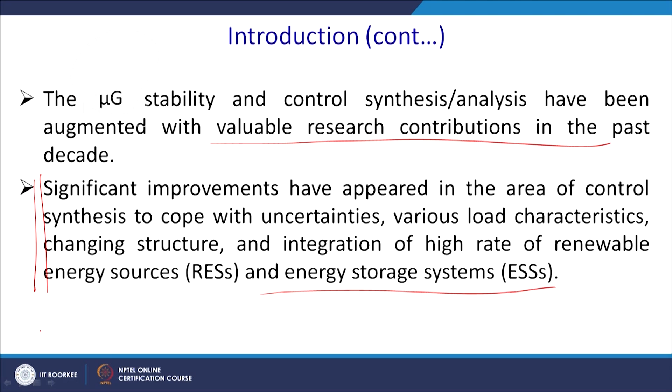And in recent years, some of the advancements of modern intelligent control methods are definitely the ANN. It has been evolving from the 70s. Professor Zadeh is an Iranian professor. He came out first with fuzzy sets, and that has been extensively used in microgrid applications, the FLC controller, and the multi-agent system, that is MAS. That is also used for multi-objective optimization.

Thereafter, you may have a particle swarm optimization technique, that is PSO, and another optimization technique is inspired from evolution. It has been considered that our kids are much smarter than us. It is because of evolution, and that entity has been taken into consideration while designing the controller, and it works on the optimization technique and the heuristic optimization technique.

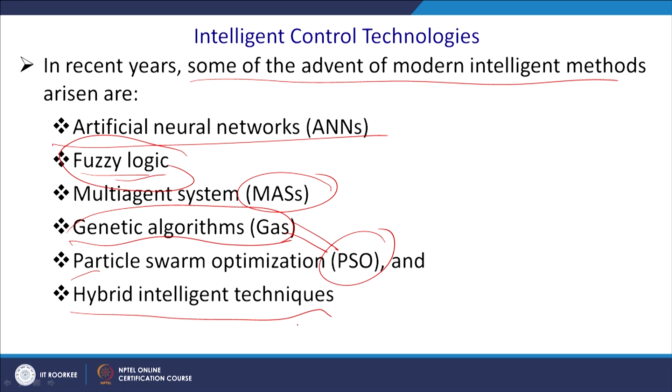But this too has a convergence problem, and for this reason the hybrid intelligence technique is used, where you have a normal gradient based optimization technique, then you couple it with genetic, particle swarm and other optimization techniques to get better results. So, that is the hybrid intelligent techniques.

Now, let us first discuss the fuzzy logic controller. We abbreviate it as FLC sometimes. Due to the simplicity, why simple? Because it works on linguistic hedges, which human beings are familiar with. The robustness, and you give a number to your membership functions. Say in your cities, if it is 40 degrees centigrade you say it is the hottest, if it is 30 you say warm. So, accordingly, in case of hot, you can define the membership function linearly sometimes, and for this reason it is simple.

It is robust because it has its own fault tolerant capability, and model free property. One of the biggest problems is that we require to make a model while designing the prototype. When you are scaling down or scaling up, you require knowledge of the mathematical model. That mathematical model knowledge is not required in case of fuzzy logic. So, you can scale it down and scale it up without having knowledge of the model.

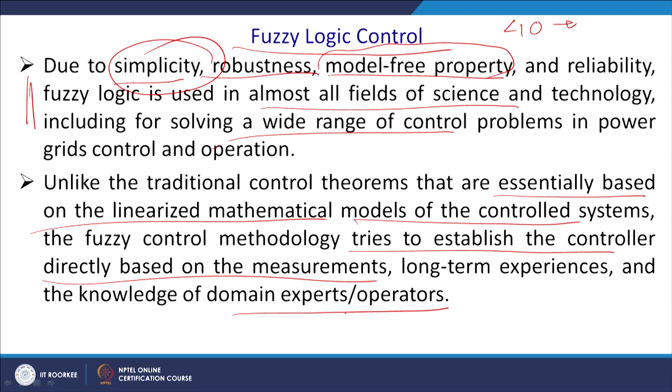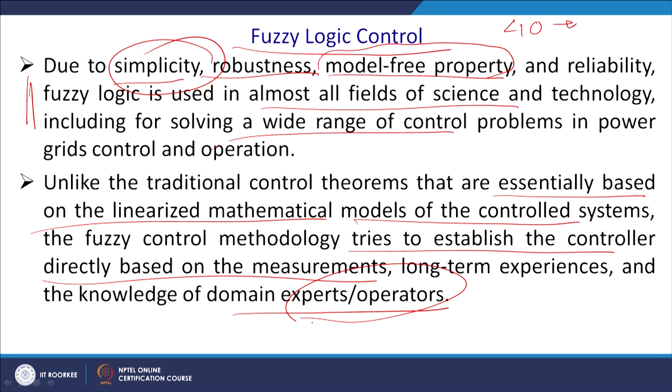So, when you know the cause and effect relations, that is basically the fuzzy expert system. You know, if it is warm, you require to put on this cloth. Say if it is a fuzzy logic controlled washing machine, you know that if the cloth is dirty and the cloth is jeans, this will be the time to be set for your washing machine. That is a rule base.

The application of fuzzy logic in a microgrid system can be classified into three categories. Using the fuzzy logic system as a main controller, as you have seen mostly in a master slave controller. Using the fuzzy logic system as a primer for tuning gains of the existing controller. As you have seen, you have different controllers in a peer to peer network, you require a PQ controller, and we have discussed so many PI controllers.

Ultimately, this PI controller will act well if you have optimally designed the values of Kp and Ki. For this reason, to get the best approximations of the PI controllers, we can use the help of fuzzy logic without having knowledge of the plant. So, in that area also fuzzy logic can work. That is what it says, using the fuzzy logic system as a primer for tuning the gains of the existing controller. And what else? Using the fuzzy unit to support, and sometimes in parallel with, the conventional controller.

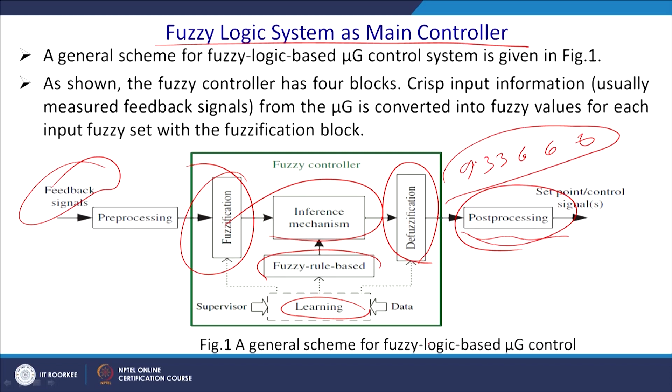There are many methods of defuzzification, and thereafter post processing, because if it generates 9.3333666 as a value for the PI controller, of course you cannot provide that value, and for this reason you have to give some kind of approximation. That is the post processing of the signal, and that value you will feed to your plant. So, this is the way you will work with the fuzzy logic as a main controller. We will continue with that.

The universe of discourse, that is a mathematical term, of the input variable determines where that universe of discourse is. Let us say theta, and your function is sine. So, your output is sine theta; it varies between -1 to +1. It determines the required scaling and normalization, something we require to do for per unit operation. So, this kind of normalization is required to fit it to the model.

The inference mechanism determines how the fuzzy logic operations are performed, and together with the knowledge base determines the output of each fuzzy if-then rule. It is a cause and effect: if this, then this. Those are combined and converted to the crisp value, that is a normal set value, with the defuzzification block. There are many ways to defuzzify it, and the crisp output value can be calculated by the center of gravity or the weighted average, and then the scaled output as a control signal is applied to the generating unit. This is the way any FLC will work, not only in case of the microgrid, but for any purpose.

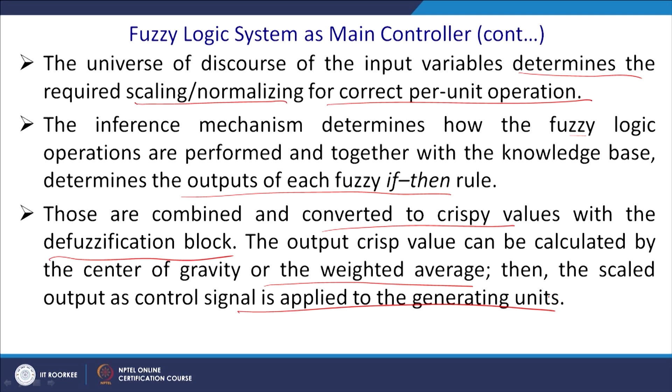Generally, a controller synthesis based on fuzzy logic for a dynamical system involves the following 4 main steps. Let us see one by one. Define the states and the input-output control variables and their variation ranges. Whenever we say states in the control system, we always understand the current through the inductor and the voltage across the capacitor, but its scope is beyond. So, it can have different states also, different quantities as the state.

Identify appropriate fuzzy sets and membership functions, and create the degree of fuzzy membership function for each input and output variable and complete the fuzzification. So, based on this, we have to complete the fuzzification.

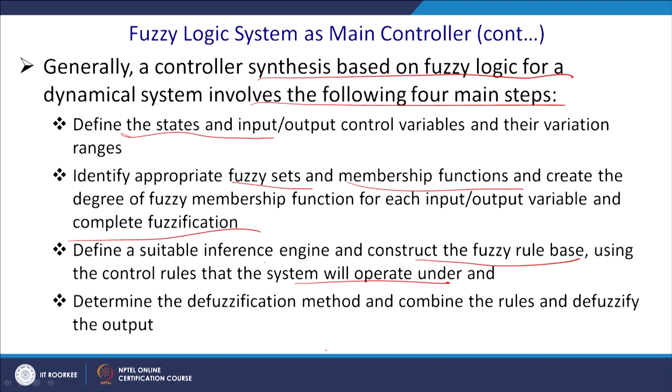Thereafter, define a suitable inference engine and construct the fuzzy rule base. That requires an expert system, if-then logic, using the control rules by which the system will operate, and determine the defuzzification methods, and combine the rules, defuzzify the output and put it to the plant for action. This is the way the FLC, or all fuzzy logic systems, will work.

In microgrid control, let us see how fuzzy can be implemented. The first step of controller design is to choose the correct input signals to the microgrid set points. So voltage, current, and if it is an AC microgrid, frequency, then PQ values, whatever value is required, you will take it from the set points. The output frequency, voltage, current, power and their derivatives are commonly chosen as inputs of the fuzzy controller.

Thereafter, these signals are used as rule antecedents, that is the if part. So voltage is this, current is this, power is this, frequency is this, load is this: that is the if part in the formation of the rule base. And the controller output is used to represent the rule consequent, which is called the then part of the rule base.

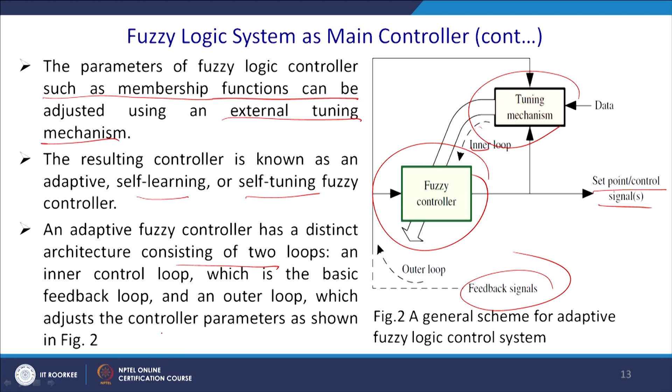An adaptive fuzzy logic controller has a distinct architecture consisting of two loops, an inner loop and an outer loop which adjusts the controller parameters, as shown in figure 2. The adaptive fuzzy logic controller commonly uses some other intelligent technique, such as a neural network, in the tuning block, which has learning capability because you can change the weights and it will learn, and this combination is said to be the neurofuzzy controller. The neurofuzzy controller is a fuzzy controller that uses a learning algorithm inspired by neural networks, the backpropagation algorithm or any other algorithm, LMS algorithm, and determines the parameters by processing data samples.

Now, let us take an example of fuzzy logic for controller tuning, a simple example of the PI controller. The PI controller structure has been widely used in power grids as well as at the microgrid controller level due to its structural simplicity and inexpensive cost. The integrator can be implemented in the analog domain by an op amp, and the gain also by an op amp. One operational amplifier is sufficient to be used as a PI controller, so it is quite inexpensive.

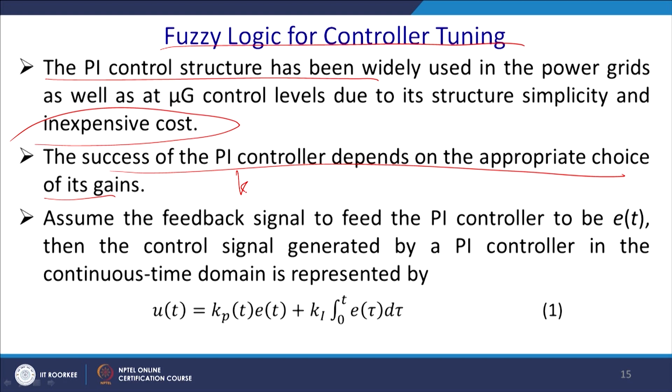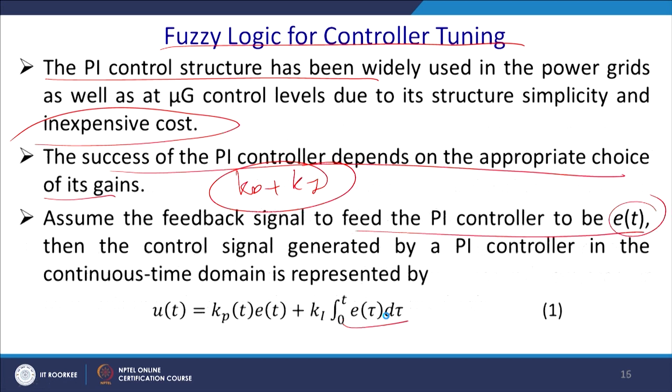Assume the feedback signal fed to the PI controller to be e(t), that is the error signal we sometimes say, then the control signal generated by the PI controller in the continuous time domain is given by u(t) equals Kp times e(t) plus Ki times the integration from 0 to t of e(tau) d tau. Here u(t) is the control signal and Kp, Ki are the proportional and integral gains of this PI controller respectively.

In practice, the PI gains are usually realized by experienced human experts. There are different methods, such as Ziegler-Nichols methods, to tune the PI controller, but you require to know the plant model then, which may not be capable of achieving optimal performance of the microgrid control applications due to the nonlinearities, varying structures and uncertainties of the loads and the source. So, uncertainties come from both.

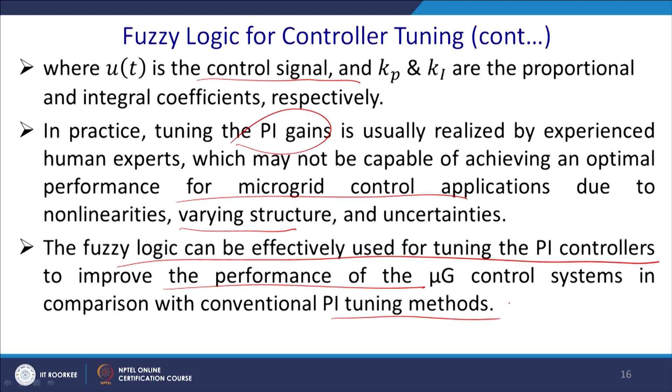And here fuzzy logic can play an important contribution. Fuzzy logic can effectively be used to tune the PI controller to improve the performance of the microgrid control system in comparison with the conventional tuning methods. Due to limits such as physical constraints and uncertainty in the microgrid, it may be difficult to meet optimal performance using a conventional PI controller. So, that is quite challenging, you require to have a mathematical model.

In response to this challenge, in this category, the fuzzy logic system is used as a supplementing controller to provide a compensating signal to correct the control action signal provided by the conventional PI controller. So, that is the advantage of the FLC. So, adding the signal slightly corrects the PI controller output through the fuzzy rules according to the online information; it is the task of the FLC to fine tune the PI controller process.

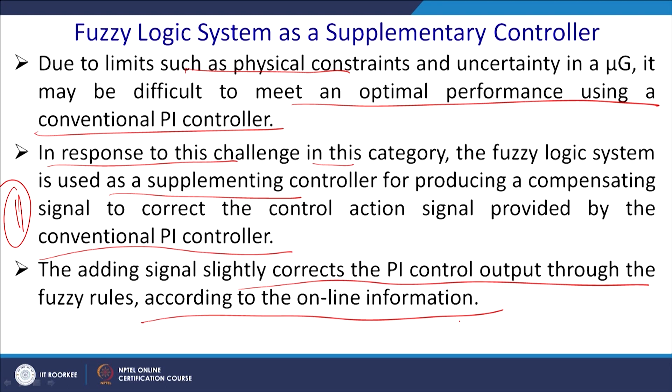The performed complementary signals can perform an effective role in optimal tracking, because if you have a large error, then the output can be very high, and when you have the least error, the value of Kp may be required to be reduced, but you cannot do that. So, for these reasons, this fuzzy logic based system can act very fast, and this is a simplified control scheme as shown in figure 3.

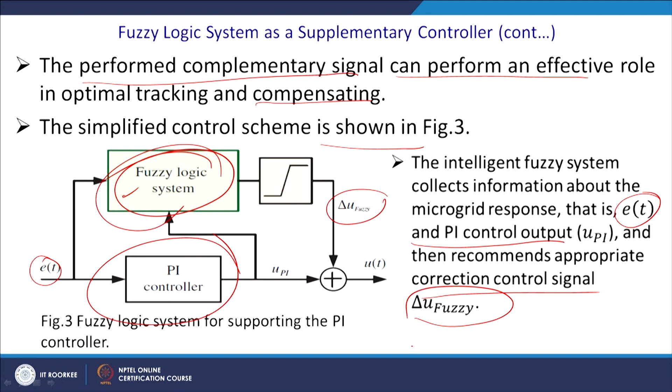The intelligent fuzzy system collects the information about the microgrid response, that is e(t), it can be voltage, current, frequency for the AC microgrid or the DC voltages for the DC microgrid, and the PI controller output, and then recommends appropriate corrections of the control signal, that is delta U fuzzy. So, the fuzzy system performs as an automatic tuner.

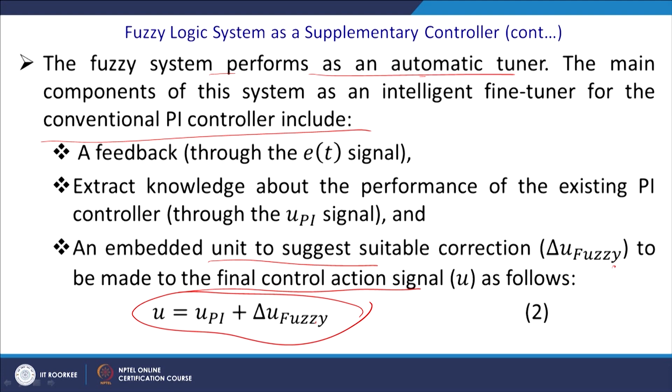The main component of the system is an intelligent fine tuner for the conventional PI controller, and it includes the following entities: feedback through the e(t) signal, extracting knowledge about the performance of the existing PI controller through the U PI signal, and an embedded unit that suggests suitable corrections of U fuzzy to be made to the final control action U. Thus the action is U equal to U PI plus delta U fuzzy, which will ensure more proper action of the PI controller.

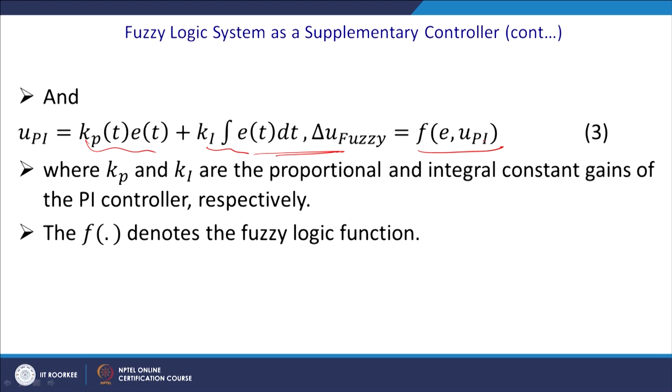And if you add up these things, this is the U PI, this is Kp plus Ki, thereafter it has a PI controller, then you got U fuzzy, and now this U fuzzy is a function of the error as well as U PI, where Kp and Ki are the proportional and integral gains of the PI controller respectively, and F now denotes the fuzzy logic function, it can be sigmoid, it can be anything else.